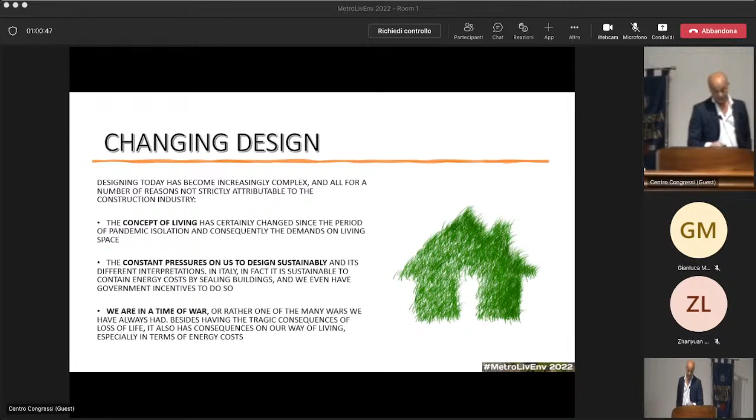Today, the new needs that contemporary life demands of architecture and cities mean that the project must become an interpreter of the place and needs of inhabitants through appropriate technological solutions, whether intervention in urban suburbs, smaller towns, in public housing estates, or in disused industrial areas.

Action is called for that guarantees direct and indirect benefit, interprets the desires of communities involved, and responds to new environmental paradigms. The aim is to reflect on the key indicators on which the achievement of sustainable quality may depend, compared with the more traditional construction process. Investigate the new subject areas, supplement existing ones with new specific requirements, relate the new indicators to the areas of application and the different levels of the project.

Show the designer the way to improve the building's environmental efficiency performance and to promote the use not only of clean technology, but also the methodology to manage them clearly.

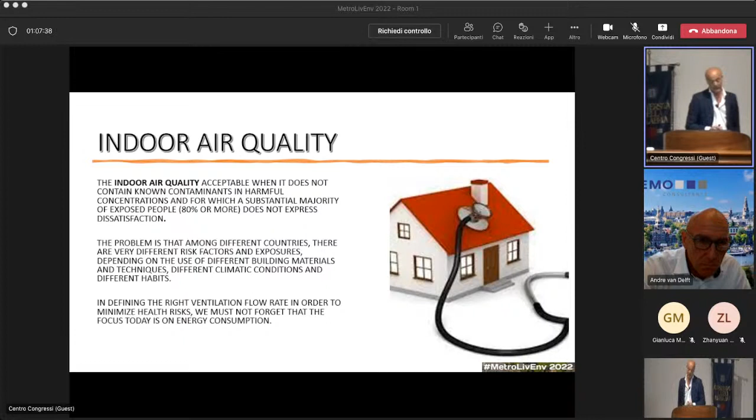The importance of this lies in the fact that currently in Italian legislation, there is no specific reference to indoor air quality, although several commissions and research groups have been working for some time. Among these, the National Study Group on Indoor Pollution, activated by Istituto Superiore di Sanità, in which various components are represented, is very active.

And even in some Europe member states, the occurrence of poor indoor air quality conditions is not yet fully regulated because there is not enough information for risk assessment. Among the different countries, there are very different risk factors and exposures, depending on the use of different materials and construction techniques, different climate conditions, and different habits.

Bearing in mind that in defining the right ventilation flow rate, the problem is the need to maximize comfort and minimize health risks, not forgetting to consider the energy consumption related to ventilation. But this direct link between ventilation, airflow rates, and energy consumption is not easy to solve. It's a matter of reconciling solutions to the problem that are in contrast to each other.

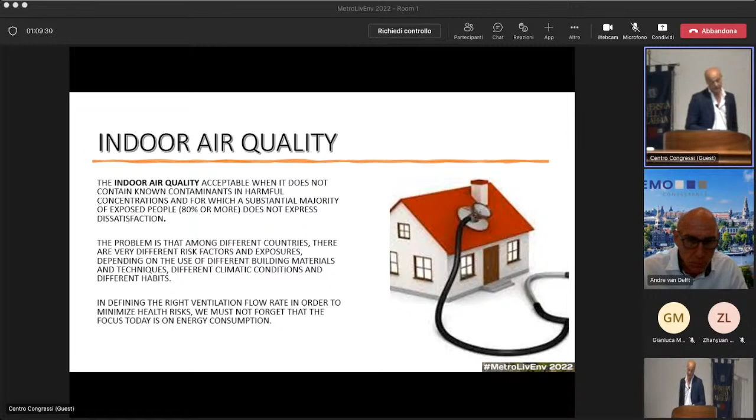To deal with certain pollutants, it is convenient to increase the external airflow rate, while to deal with other pollutants, the solution may be represented by a decrease in the external airflow rate.

For some decades now, the problem of air quality into non-industrial confined environments has taken a considerable importance, certainly because of the importance of the technical and design implications, but above all, because of the impact that air quality has on people's health.

The scientific community, due to the occurrence of specific pathologies and situations of discomfort in occupants at homes and offices, has reiterated the need to investigate the sources and agents responsible, to quantify the impact on health of exposure to particular substances or materials, and of course to indicate possible remedies and appropriate technical solutions.

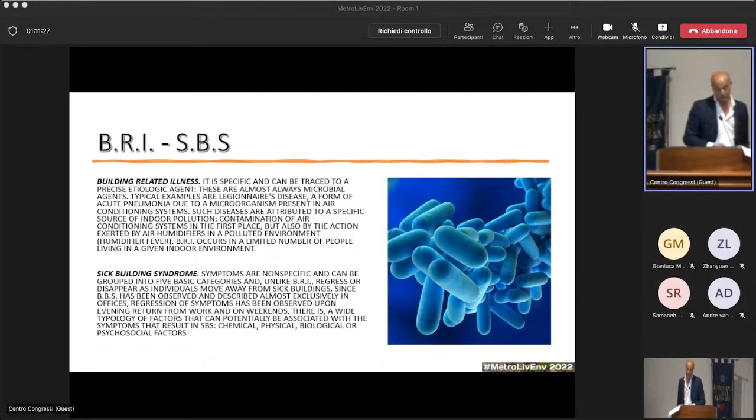It has a different characteristic from BRI. The symptoms are not specific, and unlike BRI, they regress or disappear as individuals move away from sick buildings, and are now being treated insistently.

For some years now, in the most developed countries, a new issue of primary concern for public health has been emerging. The air that one breathes inside non-industrial built places is more polluted than the air outside, and this is particularly serious because the majority of the population spend most of their time in such places.

The home, after decades of building policy geared towards quantity objectives, has now become a dangerous place, exposed to radiation of both natural and artificial origin. The problem, I continue to say, is aggravated by the fact that today we are too distracted by uses of energy efficiency, energy conservation, and energy saving. And such indications are totally at odds with the indoor problem-solving strategy that prefers more ventilated and less sealed environments.

The term Legionnaires' disease began in 1976 when a bacterium leaked through the water into the air conditioning system of a Stratford hotel in Philadelphia, killing 29 veterans of the American Legion at an American Legion Convention.

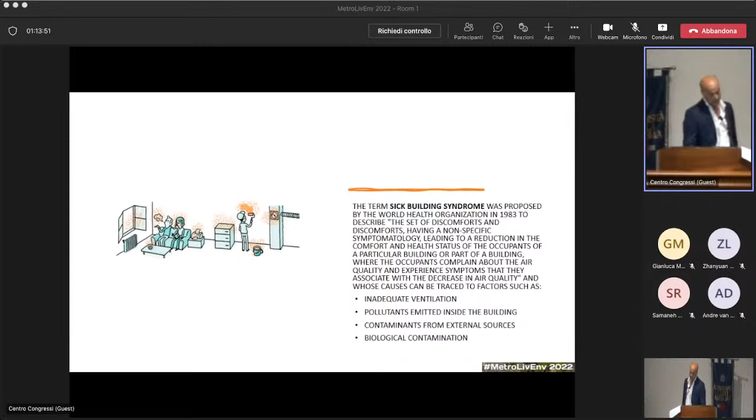The concentration of pollutants which are harmful to health and living comfort depend on several factors: the introduction of new products into the building cycle, poor design attention to technical solutions, decreased ventilation due to the increased sealing of buildings. To pollutants of new type or newly identified are added traditional pollutants.

The result is that a mixture of all the new contaminants is detected inside buildings, and that this mixture is diluted less effectively than in the past due to the measures to contain energy consumption in buildings, which has led to an overall decrease in ventilation.

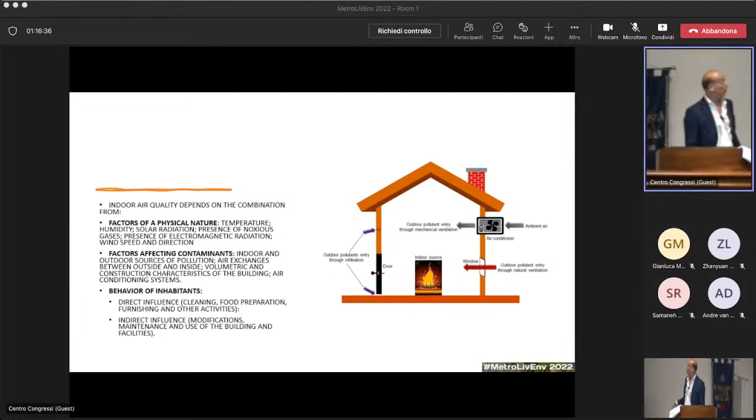Air quality control involves all aspects and phases of design, construction, testing, and management of the building plant system. It's a very complex system, and attention must be paid from the conception phase to implementation and then use by the occupants: building siting, climate, building physics, building technology, ventilation and air quality, thermal indoor climate, and general requirements on indoor climate technology. The European Community study classifies these into four main categories: physical, chemical, biological, and psychosocial.

Today, the situation is aggravated by what has happened and is happening because of COVID, in an era of technological optimism in which we are convinced that technology can defeat any problem of mankind. Our vulnerability manifests itself even more in the face of fear of contagion from a disease. Since then, all the press, media, and news outlets have been dealing with COVID-19 on a daily basis, offering us guidelines for prevention and the best behavior to take.

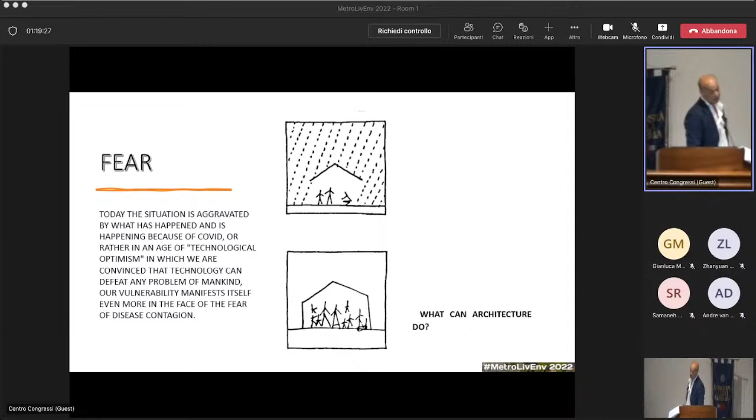The fear of contracting the virus is capable of profoundly affecting the everyday life of individuals, negatively influencing a physical condition characterized by states of anxiety and high stress. These states of affairs, beyond any ordinance, instinctively led us to take refuge in our safe place, the home. In the face of a mature and advanced debate, the current context prompts us to deepen the discussion by entering the domestic space of living, asking a new question: how to improve the habitability conditions of families living in flats of few square meters? How can we implement the provision of services for the weaker segments of the population, such as the elderly living alone? What can architecture do?

Indoor air pollution is still a much debated and investigated problem, and it's only recently that research activity has produced significant results on concentration of indoor pollutants, identification of pollution sources, relative emission rates, and the assessment of the effects such pollution has on the health of inhabitants. Results that allow the outlining of strategies for protection and control of built space from harmful actions. It's important to emphasize that these are strategies and not only technology, because as much as, and perhaps more than, techniques, it's important to have an informative program on the problem and regulatory action inside and outside of the building process.

The development of an air quality verification project in confined environments requires systematic evaluation to be carried out in many directions. It must cover both the identification of contaminants whose presence is to be measured, and therefore the choice of the most appropriate equipment for the relevant measurement, and the evaluation of all those factors that influence the occurrence of indoor air quality problems and can change the internal concentration of contaminants. Further evaluation concerns the number of points at which measurements will be made in the building under examination, the duration of the measurements themselves, and the number of buildings to be examined.

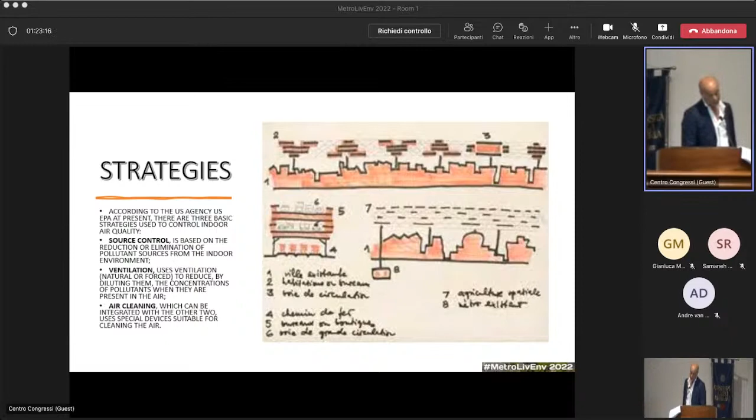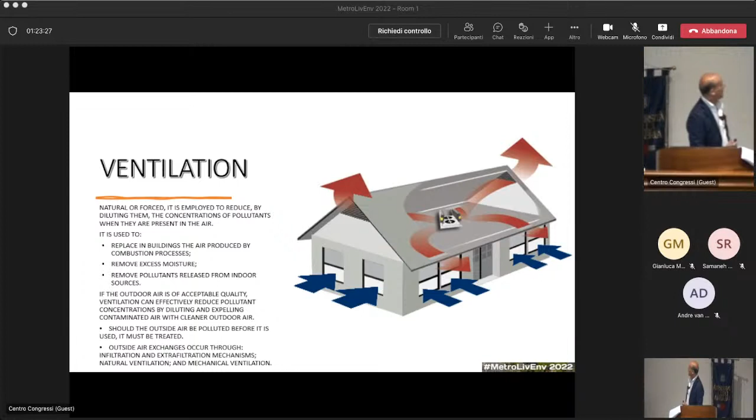According to the USA agency EPA, there are three basic strategies used to control indoor air quality: source control, ventilation, and air cleaning. I'll be speedy on this slide. Ventilation is a different strategy to solve problems.

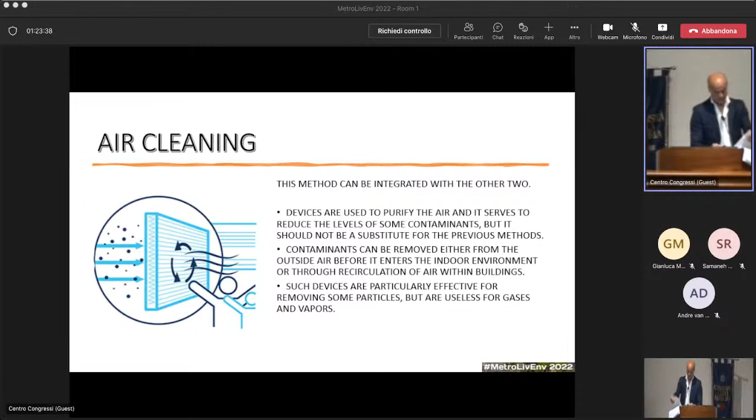In the field of verification of indoor air quality, the term measurement is used in a broad sense. Its meaning includes measurement carried out through physical and chemical methods for sampling and analyzing the concentration of contaminants, air exchange rates or environmental parameters, but it also refers to the use of questionnaires and similar instruments in order to obtain other useful information, equally important, regarding the characteristics of the building.

Conducting an investigation on an existing building is therefore a complex matter full of variables, and for this there are many different methods and protocols of action, even more so for homes. Most protocols provide indications as an operational guide for identifying the causes of disorder and for suggesting recommendations to solve them. The most critical moment is the definition of the spatial and temporal limits of the investigation.

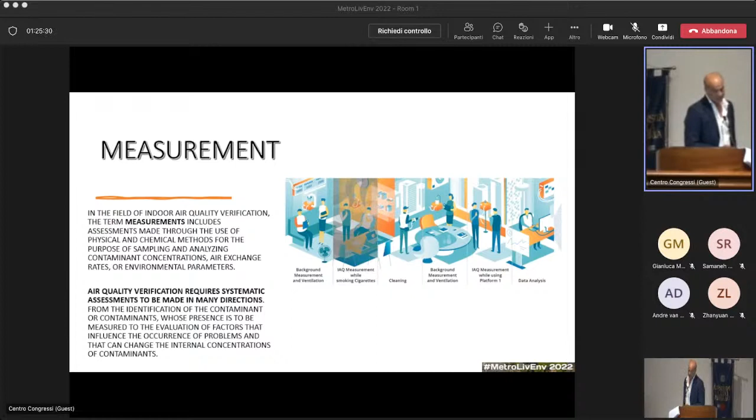For those who live in this space, the USA EPA developed an investigation model for residences and small buildings based on the following basic steps: initial approach, inspection, and evaluation and interpretation of results.

The difficulties are aggravated by the shortcomings of the regulatory apparatus both at the European and national level. The legislation is, to date, unable both to define measures and verification methods capable of identifying precise standards for living comfort, and to identify precise references to be followed in design, construction, and production of materials and components. While it's possible to determine the harmful emissions of individual materials in the laboratory, this data, when transferred to reality, becomes untranslatable due to the combination of factors that interact in the confined environment.

It should also be added that current strategies and regulations concerning the use of building materials are not only aimed at reducing the risk of indoor pollution, but at the ecological nature of materials in general: the use of regenerable or abundantly available raw materials, energy saving, harm to workers, as well as recyclability and disposability without environmental risk. It is therefore necessary to undertake a new path of prevention, paying renewed attention to the level of the project and project control, production of building materials, products and components, the construction process and its control, and the management and maintenance of the building.

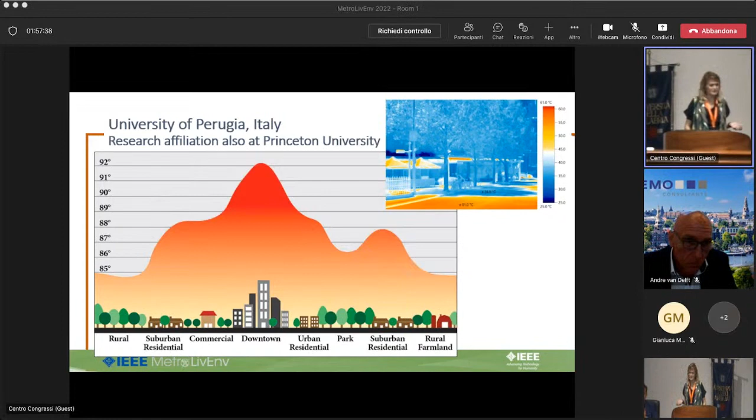This opened the door to, probably the reason why Gianluca decided to invite me, because I'm trying to face the challenge of mitigating urban heat islands by pursuing two kinds of paths. The first path is related to the proposal of new and smart materials to cover building skins and urban skins in general - materials able to reflect or re-irradiate the heat radiation back to the source, or at least not contribute to urban overheating, and to test this material at a multi-scale, starting from material characterization in the lab up to the relatively larger scale of urban canopy and urban canyon models.

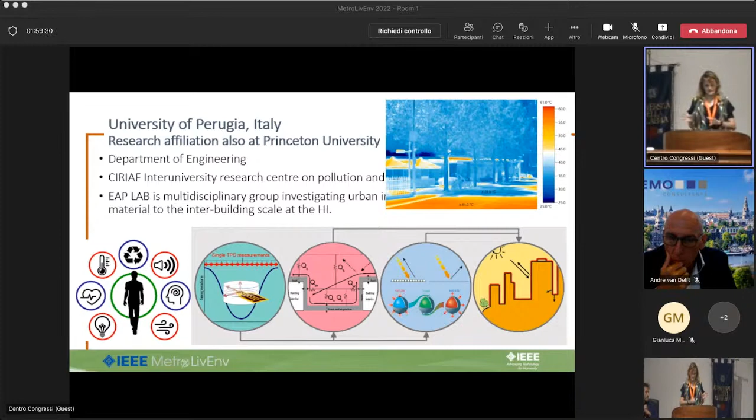So the idea is that probably this is why I got this project, an ERC grant related to the proposal of new building skins and urban skins for urban heat island mitigation again. The idea here is that typically classic cool materials are characterized by high solar reflectance in order not to get overheating during the course of a sunny day like this, but they typically re-emit and reflect in a Lambertian way, in all directions, and pretty homogeneously within the spectrum. Our idea was to propose what is technically named radiative coolers, and especially selective radiative coolers, because they are able to re-emit radiation back to the specific atmospheric window where the atmosphere is transparent.

So imagine you want to re-emit radiation - of course, if you are in a room, you re-emit it all over in every direction. So probably the radiation coming from this surface is re-emitted, the surface is somehow cooled, but then all the other surfaces become hotter.

While the atmospheric window is a classic window, imagine that you can re-emit preferentially within that window in order not to contribute to the urban heat balance, but to be able to re-emit outside the atmosphere, to the cooler sky. That's why this kind of solution may somehow reach subambient temperature.

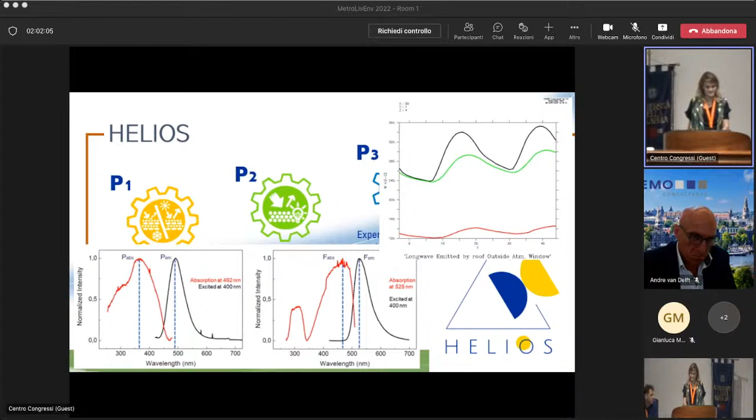Who we are, basically, is a single PI project, but we aim at building a relatively large group, thanks to the fact that in Italy we have relatively minor salaries. So with the same amount, we can hire some PhD students, postdocs, and senior researchers.

And I wish to thank all of you for your attention.

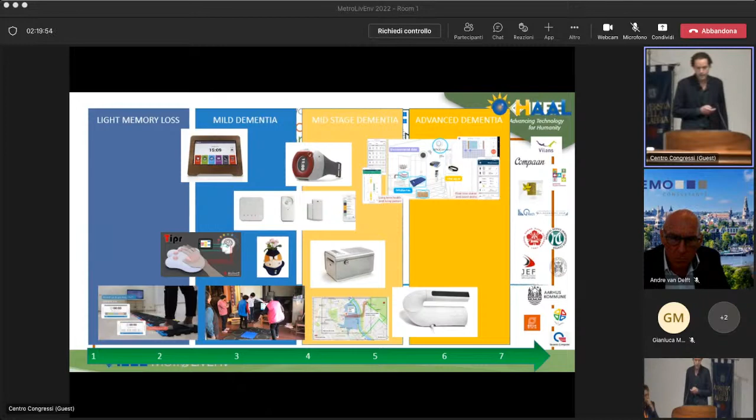In September this year, we'll have a first prototype for usability testing. At the end of the year, alpha testing, and next year, beta testing. That will also be done in all these countries. So this is what we aim for.

An integrated dashboard in HAAL where all the data comes in, working like a traffic light system. For example, when data from different sensors detects something might be going on—wandering, getting out of bed a lot, maybe well-being issues—the combined data will work as a traffic light system. Red means a huge deviation from normal, orange a small deviation, and green means everything is okay.

So that was my talk, and thanks a lot for listening.

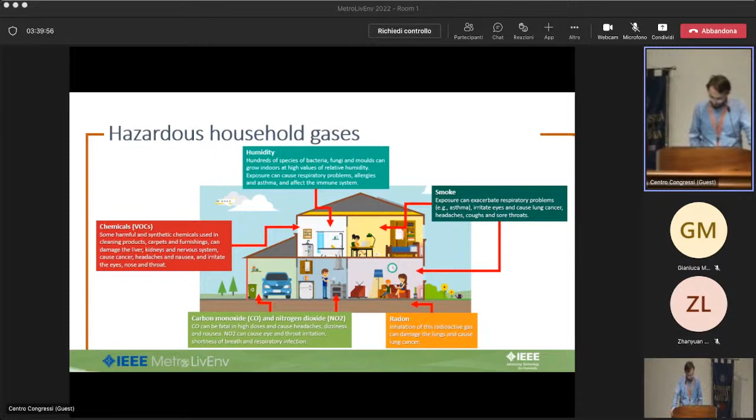Humidity is also very important inside a home. High levels of relative humidity can produce a growth of bacteria, fungi, and molds that can affect the immune system and bring respiratory infections, allergies, and asthma. So for this reason, even though air quality monitoring is not mandatory, it is sometimes strongly recommended inside our homes.

And this is the main goal of this research activity: the development of an air quality monitoring system made by different modules that are assembled together in order to produce a low-cost and easily expandable system.

This prototype is based on the Linkit One development board produced by Seeed Studio in collaboration with MediaTek, and it is combined with different sensors and other accessories. It is also equipped with a communication unit made by Wi-Fi, Bluetooth, and GSM modules to allow remote connection and remote monitoring of the system.

In this first prototype developed, we included 3 sensors: a smoke sensor, the MQ2 sensor, the carbon monoxide gas sensor, the MQ9, and a temperature and relative humidity sensor, the SHT31.

The first 2 sensors are metal oxide semiconductor gas sensors, and their working principle is well described in the literature. They are based on chemical reactions between the target gas and the surface of the sensing material, and these chemical reactions affect the electrical properties of the sensing material, for example, the conductivity.

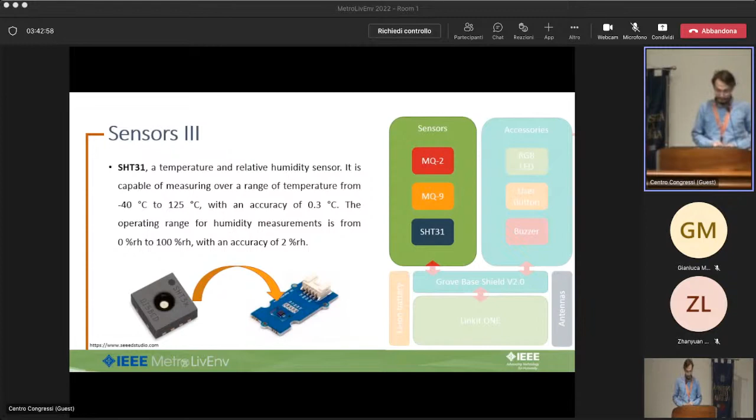For temperature and relative humidity measurements, we used the SHT31 sensor that, for our application, is characterized by a relatively wide measurement range in terms of both temperature and relative humidity, and relatively low measurement uncertainty: 0.3 degrees Celsius for temperature measurements and 2% relative humidity for relative humidity measurements.

Then, besides sensors, we included additional modules and accessories to the system. For example, a buzzer module to generate an acoustic alarm in case of danger, an RGB LED that we used as a status LED, and a user button for sensor management. Moreover, we included a battery as an additional power source in combination with the USB cable.

This is a picture of the final prototype that was assembled into a plastic box. We can see the gas sensors, the temperature and relative humidity sensors, the buzzer, the RGB LED, the user button, and then inside, in image B, the Linkit One board with the Grove Base Shield and the antennas connected to it.

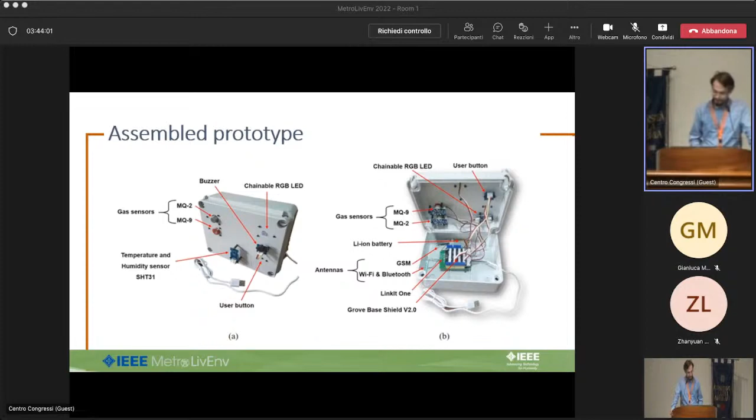A web app was developed for the remote control of this device, and for this web app we used the Ubidots platform. This platform offers several features for IoT-oriented applications.

For example, it is possible to collect data from sensors and store them on a remote server, create events, and so on. All these features and services can be managed through the Ubidots API. In our case, the Linkit One board used the Ubidots API for communication.

Besides the web app, it is possible to install an Android app and control the system remotely using a smartphone.

Our prototype was tested considering two different scenarios. In the first scenario, we are in a safe condition. In particular, the carbon monoxide level and the smoke level are below a predefined threshold that was set on the microcontroller. In this case, the LED is green and the buzzer is off.

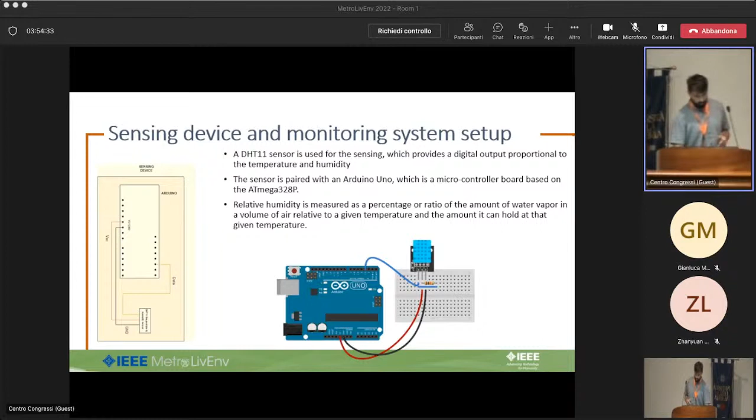A very simplistic approach we had here, just in order to use it as a proof of concept for our method. We used a simple DHT11 sensor for sensing the temperature and humidity in a physical space. The sensor was paired with an Arduino Uno microcontroller, and the measurements received by the sensor were calculated and translated to temperature and humidity values, then forwarded via a serial port to a server for the rest of the processing.

The next step is the visualization of the sensing data. For that, we used the Processing graphical library for three main reasons: one, for simplicity, because it's an open source graphical interface and uses a Java environment, which was convenient at the moment; also it uses a sketchbook format, which was ideal for pairing to Arduino; and finally, because it provides us simplification with added classes and mathematical functions and operations that were used later on for the modeling.

Regarding the GUI that we prepared, it is divided into two sides. The right side serves as a command and control interface, where all the indications of the sensing are presented, and on top there are two buttons in order to start and end the simulation.

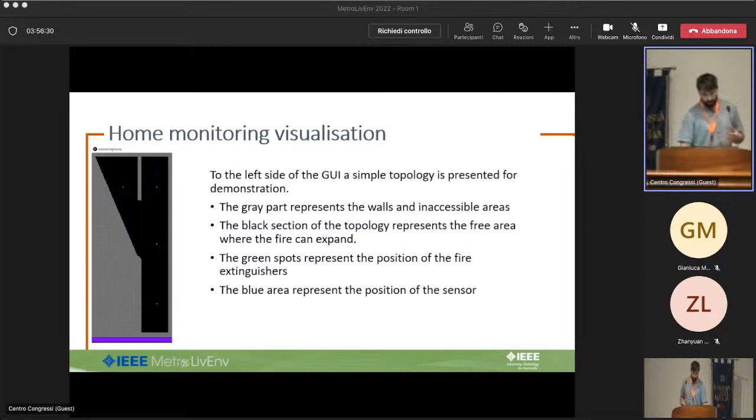On the left part, we present a simple topology of the actual space, the top view of the building floor, which will be used later for modeling. The gray part represents walls and inaccessible areas. The black section represents free areas that the fire can expand into. The green spots represent the position of fire extinguishers that we assume exist, which we later use to build our decision support. The blue spots represent the position of the sensors.

So for the early warning, the first intelligence step let's say, we just used a simple thresholding rule. A simple rule was implemented when the temperature was exceeding a specific threshold in combination with humidity.

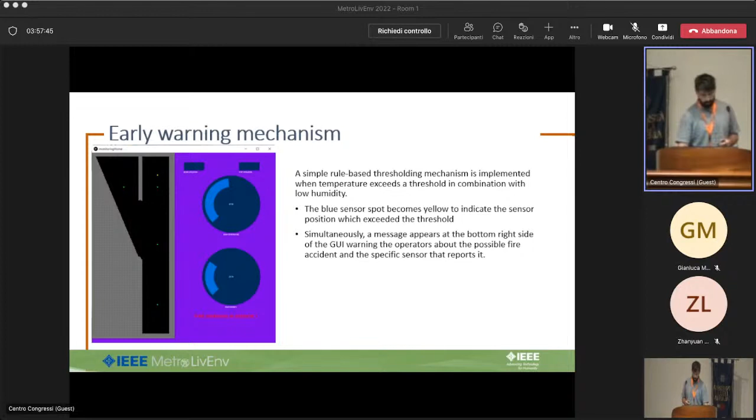As you can see here, there is a visualization when the temperature rises and the humidity remains low. There is a threshold that when exceeded, the blue sensor spot becomes yellow to indicate the sensor position that exceeded the threshold. Also, a message appears at the bottom to warn the operator about a possible fire accident, notifying the operator that something is wrong.

So now for the modeling of fire dispersion, we based it on cellular automata, which is an elegant parallel computation tool for physical systems, introduced by von Neumann and Konrad Zuse. As happens in physical systems, the principle followed is that they use the same clock, the same timer.

So for each cell, the situation in every step changes simultaneously, creating a synchronous system. The building block of cellular automata is the cell, whose state is governed by a set of rules and is also guided by the state of the neighborhood, the neighbor cells. All these cells follow the same set of rules and are arranged in a lattice to create the physical space. There are several variations of cellular automata.

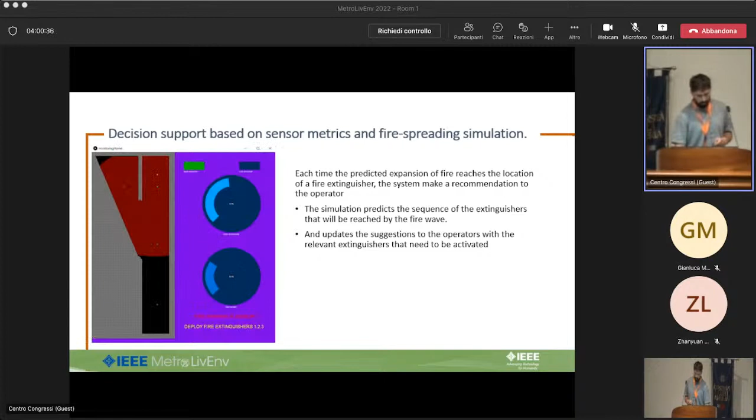More or less, this is the presentation. To conclude, what we propose is a simplified version of a digital twin, combined with cellular automata, which is a powerful modeling tool that requires low consumption and low resources, without requiring large data as learning systems do. In a nutshell, what we propose is a holistic approach integrating sensor data readings, early warnings, dynamic modeling, and decision support, drawing a pathway for future developments and implementations.

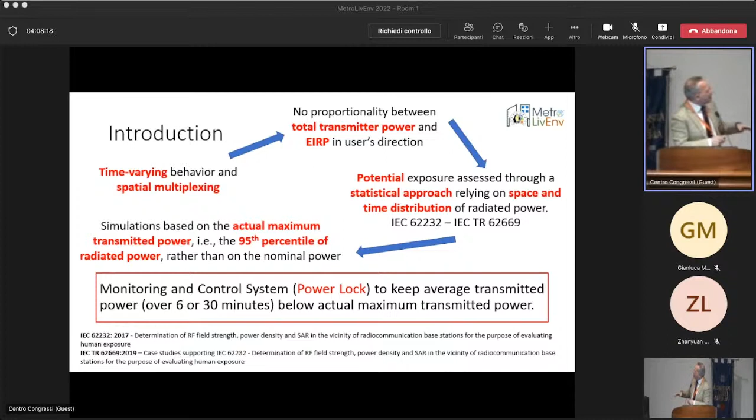And there are two international standards that tell you how to do that. Simulations are based on the actual maximum transmitted power, which is the 95th percentile of the radiated power, not the nominal power that feeds the antenna. Within the IEC standard, there are specific sections that tell you how to monitor and control the radiated power so that the average transmitted power over a reference time interval stays below the actual maximum transmitted power. And this is the power lock system.

The power lock system must, first of all, monitor the transmitted power, usually at a few kilohertz rate, then calculate the current average power. Since there's a reference time interval, usually 6 minutes in Italy, according to European guidelines updated in February 2020, the interval is 30 minutes. So you choose the reference time interval, then calculate the current average power. When the power lock system realizes that the maximum power is being approached, it must activate to limit the transmitted power so that the average transmitted power over the reference interval complies with the limits.

The main issue here is how to establish when the maximum power must be limited, so that the overall average will be below the value that makes the exposure to electromagnetic field compliant with the limits.

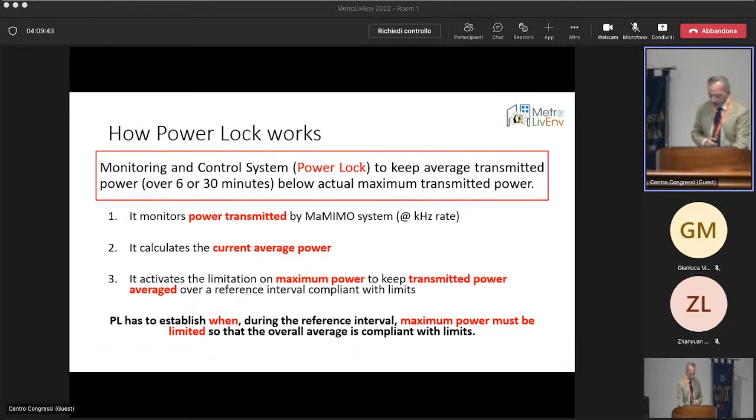When and how the power lock limits power remains up to the vendor. That's a point, because this requires that all the procedure and methodology uses a kind of black box approach. We don't know how, we don't know when, we don't know the logic of the power lock system. In a sense, our methodology has been designed having this constraint, which makes our methodology quite general, because we don't need to know how the power lock works.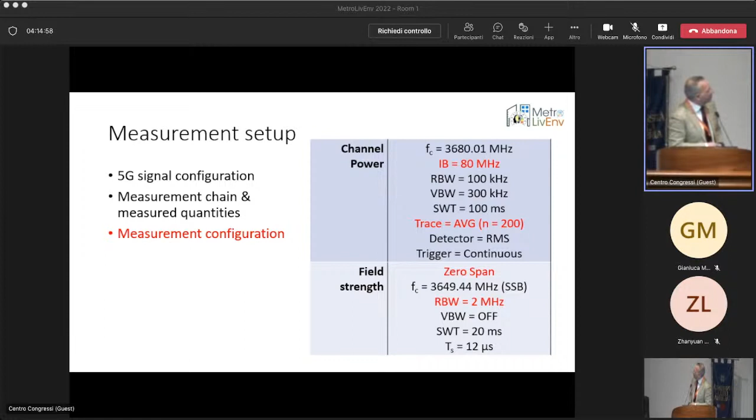At the transmission side, we measured the resource blocks and the instantaneous power with different frequencies. At the receiving side, the channel power and the field strength were both measured, of course, with different measurement chains. These are some configurations for both the channel power and field strength measurements.

Let me show the experimental results. I told you about 3 different tests. These are the 3 different time frames related to each test. We first fix P0, so to determine the value which will result in the maximum allowed average exposure.

We don't have time to go deep into these variations. This is something internal that we had to investigate with the vendor of the power lock system, and I should say the smart antenna system.

Then in the second test, we increase Pmax by, for example, 5 dB, and you can see that the power has indeed increased by 5 dB. Let me show you that even when we don't have traffic, we have an increase here of power because the signaling blocks are active.

Finally, we activate the power lock. At the beginning of the activation, the instantaneous power goes up to the maximum power. Pmax has increased by 5 dB.

At the beginning, we can use the maximum power. But since with the maximum power, P0 plus delta P, the average field would be too high and would go over the maximum allowed average field, the power lock activates and pushes the power down to the value that will result in compliance with the exposure limits.

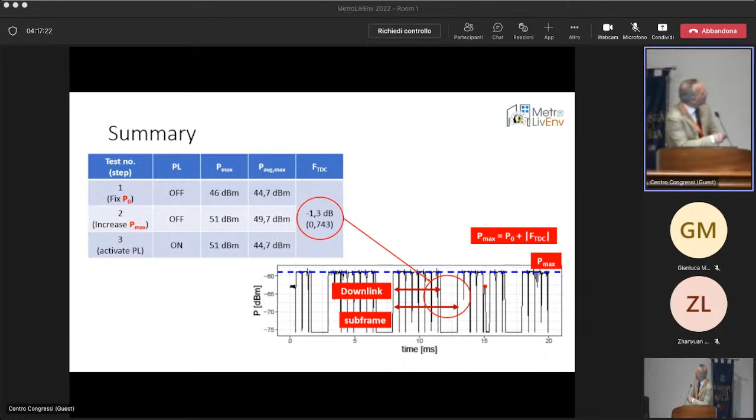Short summary: first step, we determine P0, which is the average power. P0 is related to the maximum power that can be transmitted because of the time division duplexing that characterizes the 5G system. Then we have the increase, 5 dB, and with the activation of the power lock, we have the maximum power, but the average power goes down to the average power that was before the increase of the maximum power.

The impact on broadcast channels: at the beginning, we have one specific value after determining the value of P0. Then, second step, we increase by delta P, and as you can see, the traffic channels and the broadcast channels, which give the coverage area, they both increase. When we apply the limitation of the power lock, the broadcast channels would stay at the high level, while the traffic channels, which determine the exposure, will go down to the maximum allowed value.

So let me go to the conclusion in 30 seconds. We propose a way to characterize the functionality of the power lock systems. The methodology has proven effective in demonstrating the correct operation of the power lock, and we proudly announce that the methodology has been successfully submitted and accepted for inclusion in a future edition of the reference standard for the in situ validation of such systems. The ongoing research is to characterize 3D power lock systems.

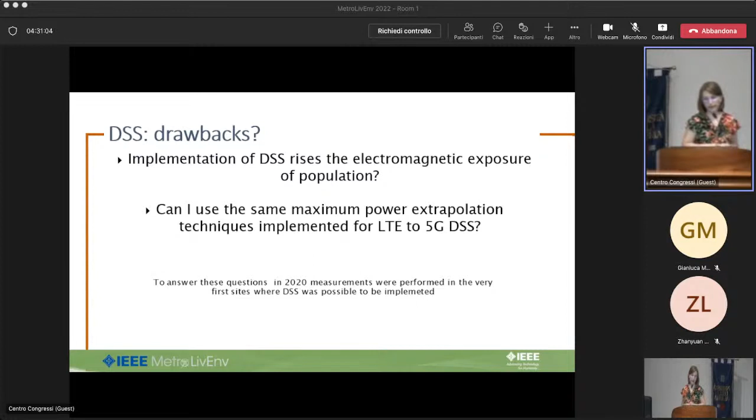Now we have to ask: does this kind of technique have some drawbacks? Implementation of dynamic spectrum sharing raises the electromagnetic exposure of the population, and are there techniques we can use to measure this exposure? To answer this question, in 2020 we performed various measurement sessions to verify this situation.

Measurements were performed in four different locations near Torino and in Puglia, in Foggia, and we used different experimental setups, which I will now show you. First of all, to compare the results, we prepared a measurement protocol that was the same for each location. Every one of us performed channel power measurements under conditions of maximum load of the cell in order to estimate the maximum achievable exposure.

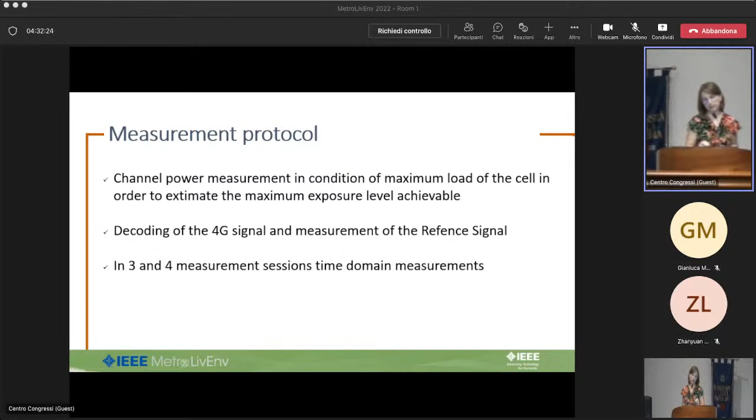In each location we performed decoding measurement on the 4G signal, and only in 2 of the 4 locations were performed time domain measurements. In 1 of the last 2, we also performed decoding of the 5G signal. This was only because in just 1 location, the 3rd location in Ivrea, a spectrum analyzer capable of demodulating the 5G signal was available.

As I said before, the traceability of measurement in different sessions was guaranteed by the use of a common measurement protocol, applying in every session the methods defined by the technical standards and the literature. So let us see what results we obtained.

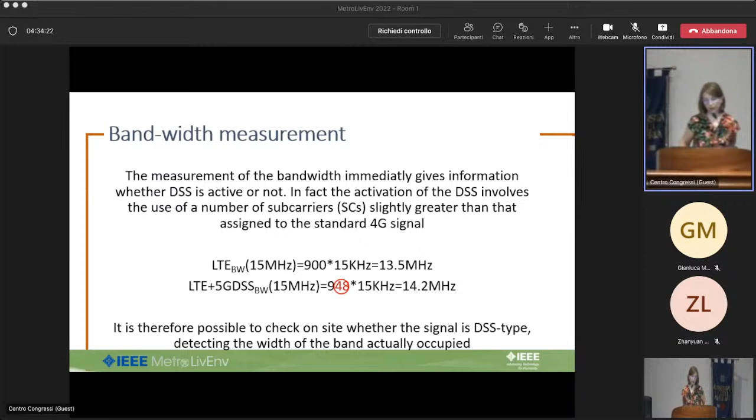First, we measured simply the bandwidth of the signals, and this first measure gives us information on whether DSS is active or not. For example, in a 15 megahertz large band, when only LTE signal was on, the band was smaller, about 13.5 megahertz. The bandwidth becomes larger in the case of 5G DSS active, due to the fact that some resource elements are activated to make room for the 5G signal. So just with the bandwidth measurement, we can obtain information about the presence or absence of the DSS 5G signal. These are the results obtained in the 4 different locations, and in every case we obtained this increase in the bandwidth largeness.

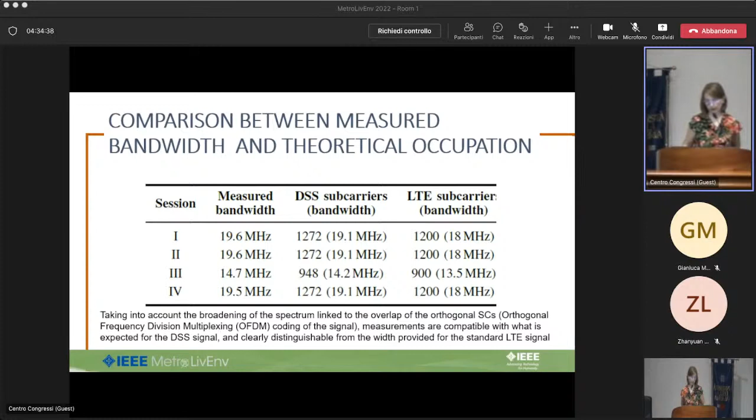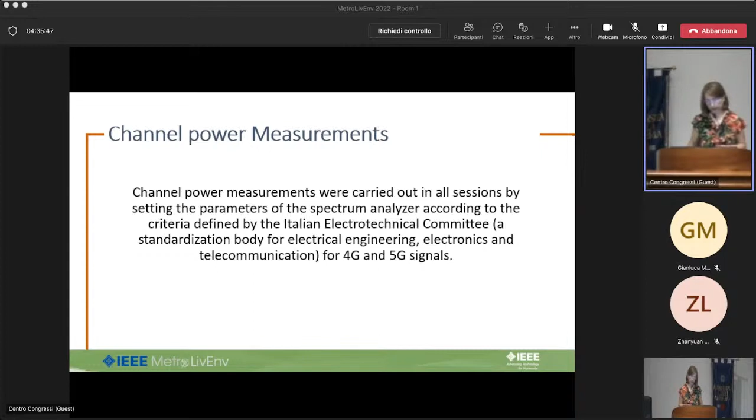Then, as we have seen in the protocol, we performed channel power measurement, and in every location the spectrum analyzer was set with the criteria defined by the electrotechnical committee, and these are the results.

However, the main result is that channel power measurement alone is not enough to give information about the maximum exposure of the population to this kind of signal.

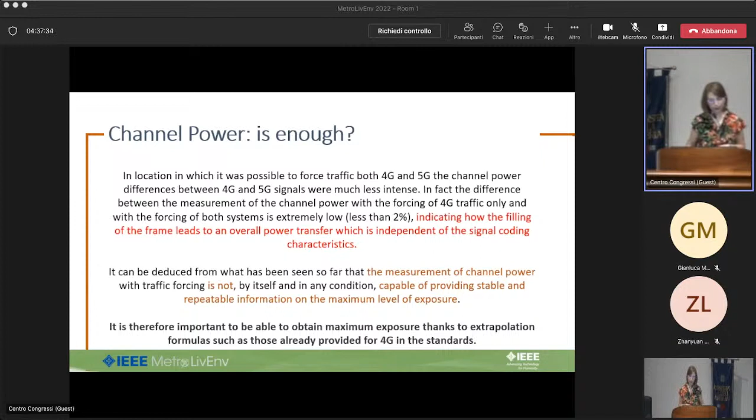Therefore, we performed vector analysis extrapolation on the 4G signal according to the method defined in the IEC standards, and we evaluated the maximum electric field exposure value using the proper number of subcarriers, as measured before with the bandwidth measurement.

I'll go faster because I see I'm late. Then we performed other measurements at the site where it was possible to demodulate also the 5G signal, and the comparison between measurements performed demodulating the 4G signal and the 5G signal showed that the measurements obtained were exactly the same.

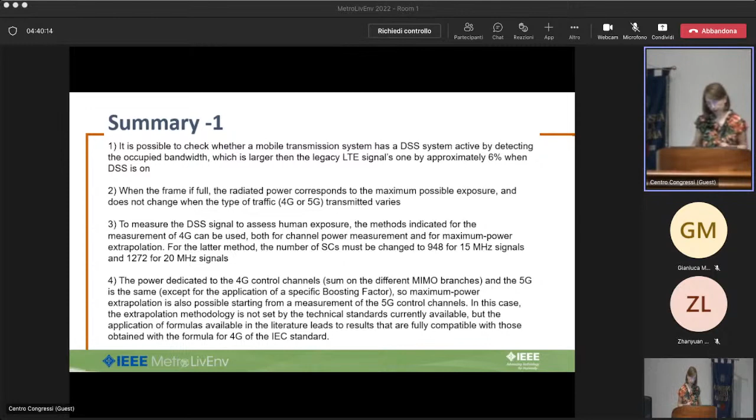In this case, the extrapolation methodology is not set by technical standards, but is available in the literature articles. And in conclusion...

Tests on instruments and methods for measuring dynamic spectrum sharing signals generated by equipment from two different manufacturers were carried out. The tests were performed on the signals of 3 different operators in 4 different sites. The evaluations performed demonstrated that measurement and estimation of maximum exposure levels are possible using tools and methods already developed for LTE signals, and that implementation of this system does not change the exposure level.

It was also verified that the same methods for measuring 5G New Radio signals available in the literature are also applicable to the detection of the DSS signal, obtaining exposure estimates that are fully comparable with those obtained using the methods for LTE. Thank you.

Thank you, Tiziana. Are there any questions or comments? I think lunch is calling, maybe. Well, if not, thank you. Thanks again. Tiziana, do you have any questions or comments? Okay, everything is fine. Thank you, Tiziana. From me and Marco, I think it's time to go to lunch, and let me thank you for being here. No, it's not yet.